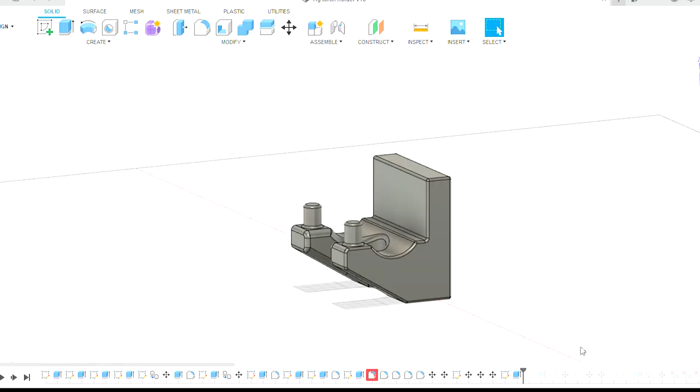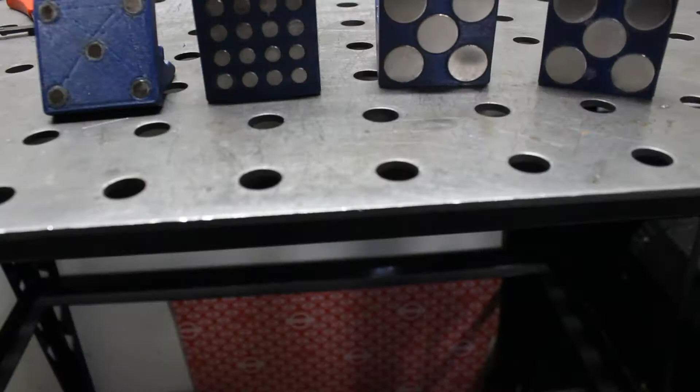I use Fusion 360 to mock everything up first on the computer, and we took measurements and everything. So we'll do that, and then go over the revisions that were made, because this is definitely not the first version. There were multiple versions to get this right. Even this, it's good enough I feel like, but we'll talk about that, and then do a final test because this is 3D printed plastic. It's PETG plastic, kind of the same stuff as water bottles. It's a little different, but for the most part it's the same. We'll do a final test where I have a piece of exhaust back here that needs to get welded up, and see if the TIG torch holder will hold up to the high temps of the TIG torch. Hopefully it does. So yeah, let's just get into it.

I also feel like I should explain why I decided to pick one up. I went down the rabbit hole the other day seeing all the different things people were making with it, and realized it's a pretty useful tool for the garage. For one, you can prototype parts, especially if it's a really complicated and intricate part, for the engine bay or the interior of the car. You can mock it up, make it out of plastic, see if it fits. If it doesn't fit, you just throw it away, make a new one, revise it, and you don't have to waste a bunch of money in materials if it's something made out of metal. And if it's something that doesn't need to be structurally strong, you can just make it out of plastic and it's good to go. You don't have to wait for something to show up, you don't have to spend the money. You just make it, design it, make it, and you have it. I thought that was really cool.

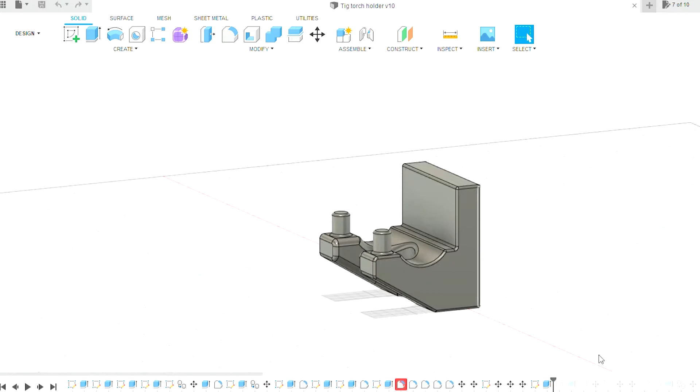So for example, I took the measurements from the holder itself, the gap right here, which I think was 20 millimeters. And then we also took the height and the width of the object just to get a rough estimate of what I needed. From there, we took it to the computer and used Fusion 360 to mock it up and design a model that I'd be happy with.

I'm not going to go into detail with what exactly I did to get that part, since I'm still learning it. I'm not the best teacher for this, but there's tons of videos on using Fusion 360. This is definitely not one of those videos. But once I had my part and was happy with it, everything looked good, it was time to test it out.

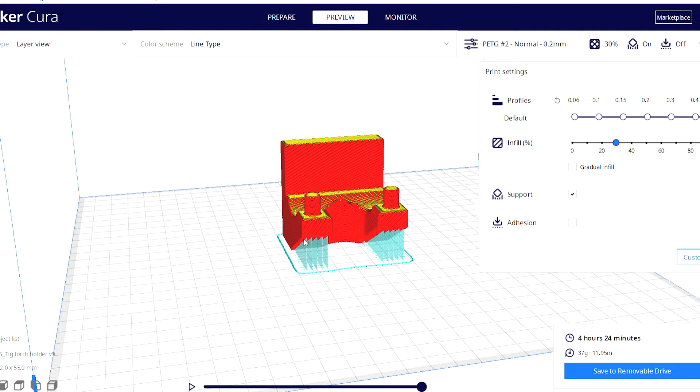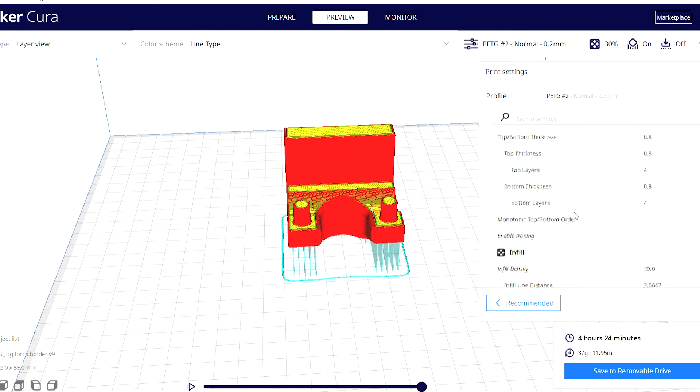So I took the STL file from Fusion and sent it over to the slicer app, called Cura, which communicates with the 3D printer and tells it all the different settings you want. For example, I used PETG plastic, and since there's such a variation of plastics, they all take different temperatures to melt and work properly. So it tells the printer, okay, the part's gonna be made out of PETG, set the bed temp to, I think it was like 90 degrees Celsius, set the nozzle temp to 250 degrees Celsius, and a bunch of other little settings.

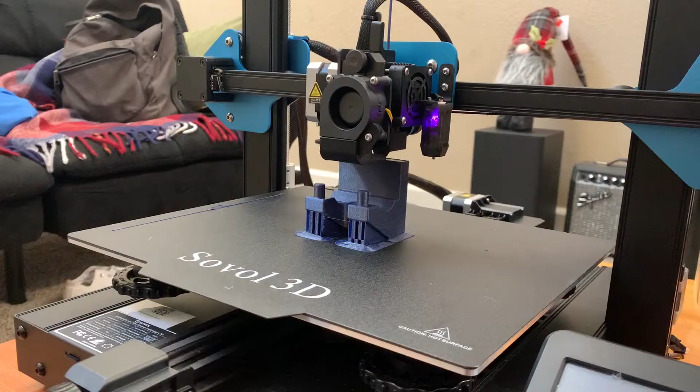It gets pretty complicated, but that essentially is what talks with the printer. So once I had everything in Slicer and had all the settings dialed in as much as I could get them, I then made it with the 3D printer. Had to wait a couple hours for the printer to do its thing - I think it ended up taking somewhere between 3 to 6 hours. And we came up with our first prototype.

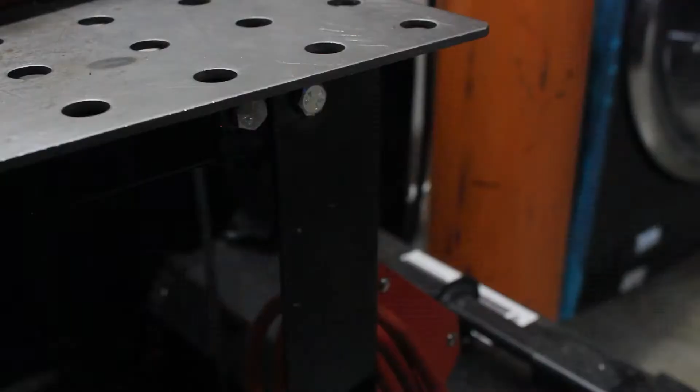And this is the first prototype. So again, I used PETG plastic - it's supposed to be more temperature resistant than the more typical PLA plastic. I made it using just 5 or 10% infill, which is essentially the inside of the part, how much percentage of it is air and how much is filament. So this one was only like 10%, which isn't a lot actually.

I just kind of wanted to make a mock-up just to see if it would fit with the torch, and it did fit. But when I was mocking it up and testing it out, I ended up breaking it - it actually broke right here. I glued it back together.

But there were some changes I wanted to make to it. One, it was weak, so I needed to strengthen it up a bit. And two, I put 5 magnets in the back, but these magnets are tiny and not very strong. So when I put it on the side of the table and put the torch on it, it would just slide straight down. I don't want that - I want it to be firm on the table and not move. So that was the first revision that we made.

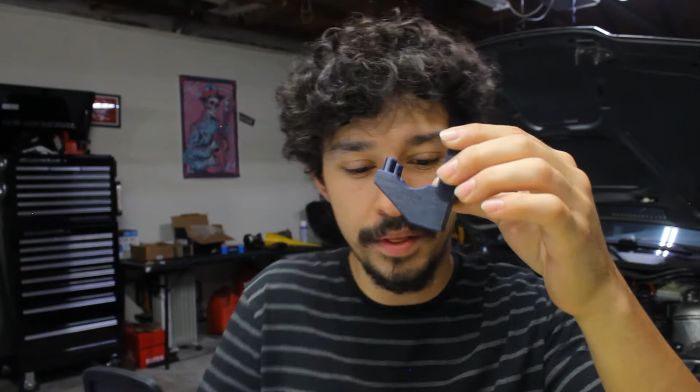So this is the updated part 2.0 right here. See, look at all those magnets - this is the original with 5 magnets, and this is the new one with a lot more. I tested it out. I also made the arms a bit stiffer and thicker compared to the other one, and added more infill - I think this one was about 30%. So it's definitely a lot heavier, and it's sturdier too.

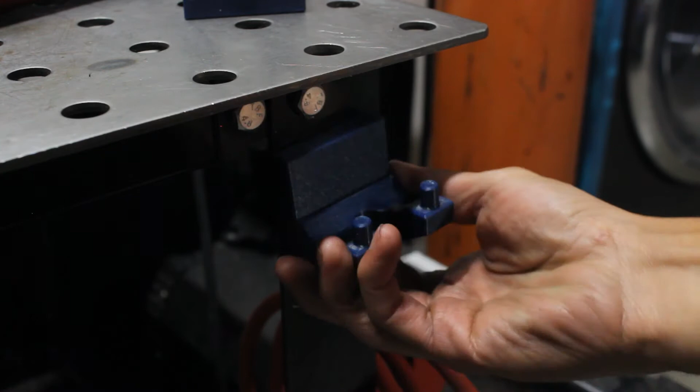But again, these look like a lot of magnets, but it wasn't enough to hold the TIG torch without moving so much. Every time I put it on, it would just slide straight down. It's a lot, but it's still not strong enough for what I wanted. So it was time to make a third revision.

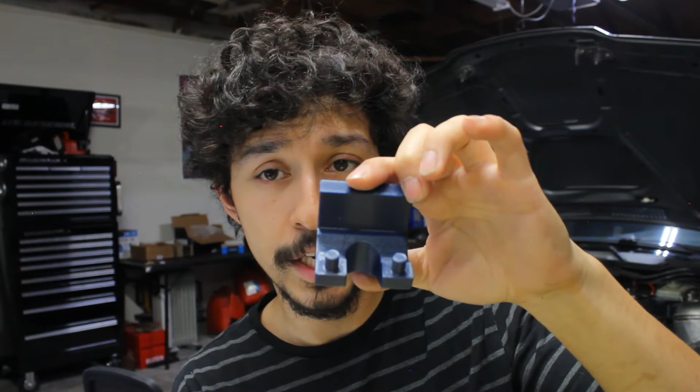And here it is. This is very similar to 2.0 - let me show you, for example, here's 2.0. They're very similar. The only changes I made were I made the throat depth for the holder itself a little deeper, just a bit deeper, as well as putting bigger magnets on the back.

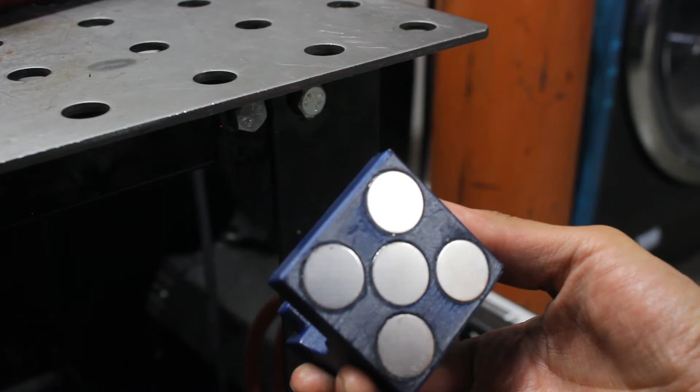So this actually helps. Now with these magnets, it's actually holding still. I can put the torch on it and it's not going anywhere - it stays in place. It slides just a bit, which maybe over time, if these magnets become weaker or if I get tired of it, I'll double up the magnets on the backside.

But it's working how I want it to, so I'm kind of happy with this. The only thing we have left now is to test it and see if it'll even withstand the temps. Like I was saying, it is PETG, and it's supposed to withstand high temps, but there's a limit since it's just plastic.

Kind of what I'm thinking is if it ends up melting, since I already have the model on Fusion 360, we can send it over to a machine shop and have it made out of aluminum. But before that, we'll just test this out, and if it works, I'll be happy. So let's get started and weld up some parts for the exhaust here and see if it'll hold up to the high temps.

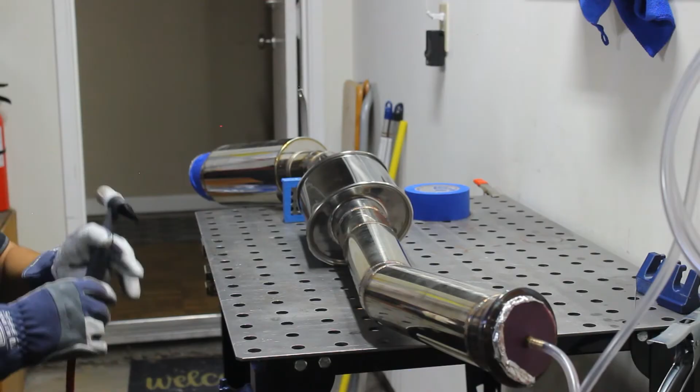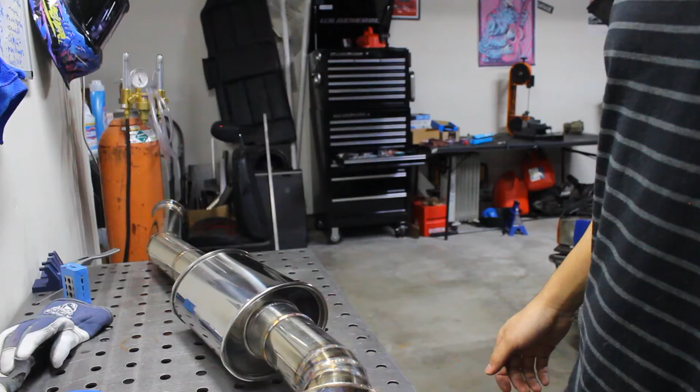Have this welded out, and we've seen that the TIG torch holder did survive. But I'll be frank, it wasn't that much heat. Since it is stainless steel, I didn't go too hot.

So what I'm thinking of doing now is switching over to aluminum and just welding up some aluminum practice pieces, and just trying to get the torch really hot, and we'll see if it'll survive then.

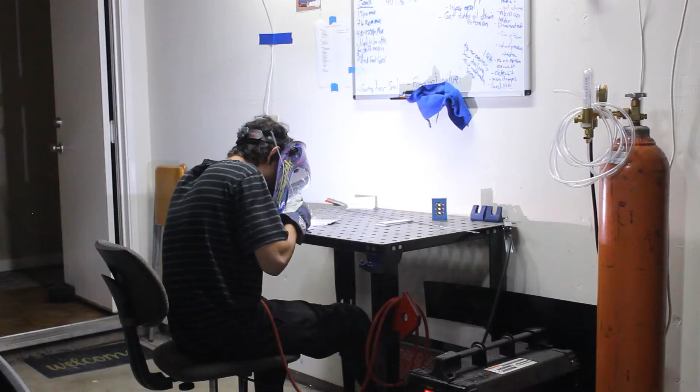Alright, so I just got done welding up some aluminum here. I got the torch really hot, and I was able to cause just a little bit of damage to the part. There's a couple dents right here. I think that's from the cup itself, as well as it did warp a bit there.

So what I'm thinking of doing is I'll probably open this up a bit, and might extend it out just a bit too, so it doesn't touch the backing. But it held up well, and it didn't completely fall apart or anything. I wasn't expecting it to. It did its job, so I definitely call this a success.

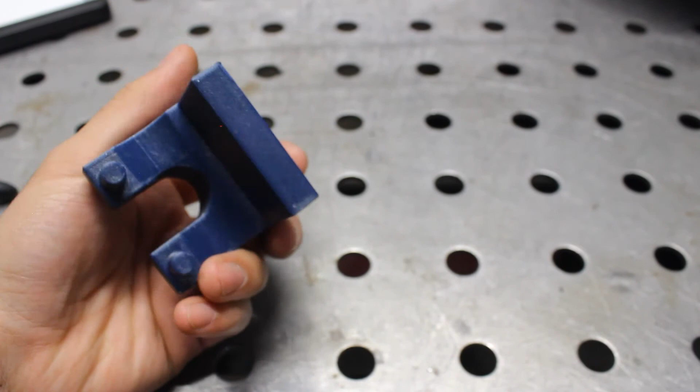So now that we're finished up with everything, I am happy with how this turned out. The torch did get really hot when we were welding the aluminum, and it did melt it just a bit. But again, if anything, you can just remake a new one or make it out of metal in the future.

There are some slight changes I might make, like I might open this up just a bit, as well as make the arms a bit longer to keep the torch from touching the back, as well as make it so you can fit two magnets in the same spot. I think that might help it stick to the table just a bit more.

Alright, this is future me coming at you. So I did end up making some more modifications to this. I guess this makes this 4.0. I did end up making it so you can fit two magnets in the same spot. So now these are doubled up, and it actually does help a lot with helping the holder stick to the table. I also opened up the slot here a little more, so it's a bit wider.

So now it can fit the torch easily, and it might even be able to fit other torches other than the one that I have, which is a CK17.